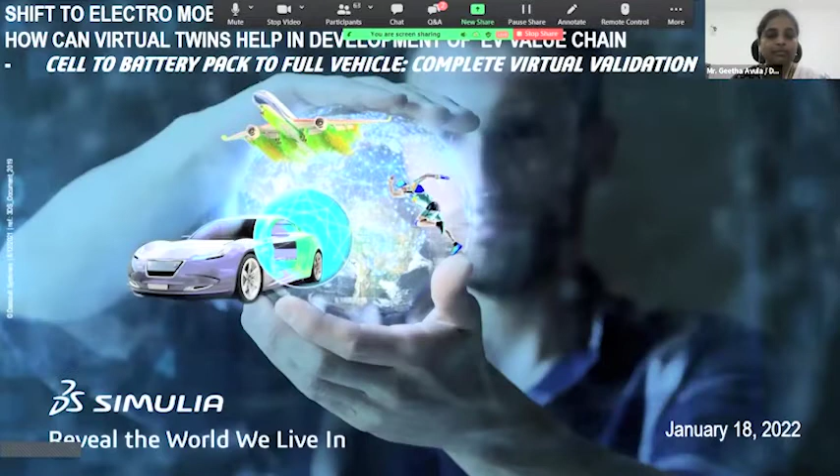We had interesting discussions from other panelists on how we are evolving in the EV space and the trends and challenges we are facing. In the next ten minutes, I'll take you through a short presentation on how virtual twins can help in the development of EVs, right from cell to battery pack to full vehicle.

So what are virtual twins? Virtual twins are essentially used to model complex systems, be it cars, cities, factories, or human hearts, wherein we could simulate the functioning of these systems with a very high level of accuracy. Whether at an assembly, sub-assembly, system, or subsystem level, we could build a virtual twin that is a replica of the actual physical model on the digital platform, and understand the behavior and performance by simulating and doing various testing.

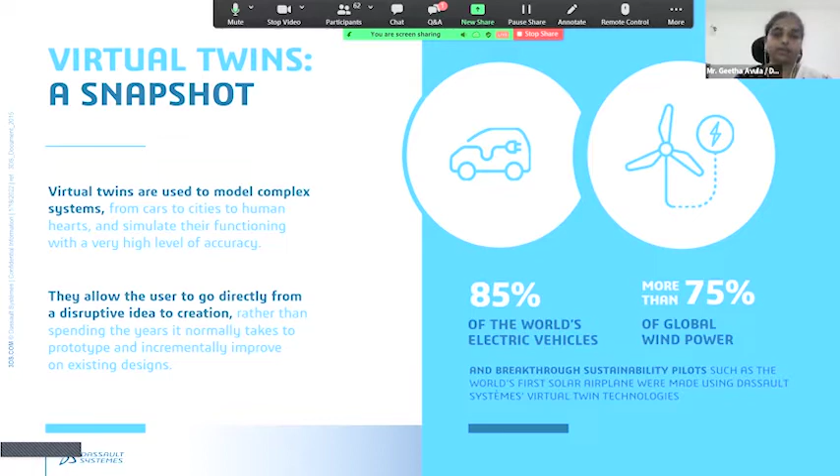Essentially, by avoiding physical, costly prototyping, we can directly go from ideation to creation by using these virtual twin techniques.

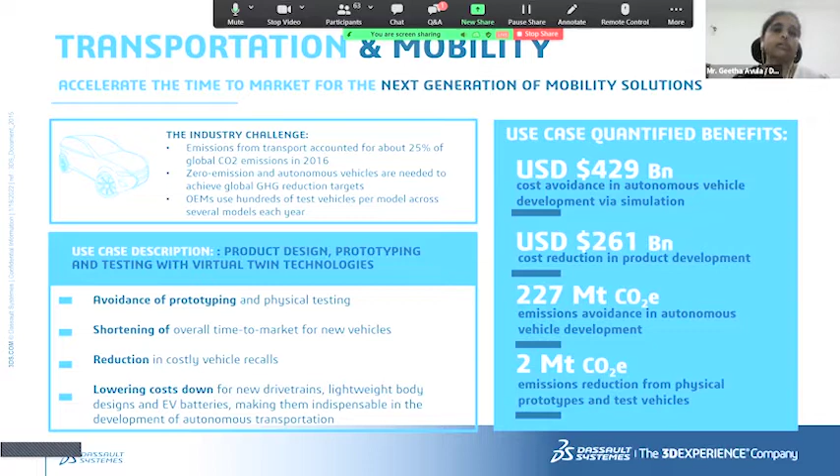If you look at the transportation and mobility industry, the other panelists have certainly spoken about the industry challenges, and emission is a concern. From the automotive industry, emissions account for about 25% of global CO2 emissions. To achieve global greenhouse gas reduction targets, everybody is moving towards zero emission and autonomous vehicles. Typically, OEMs use hundreds of test vehicles per model every year for testing purposes. So clearly the use of virtual twins will help avoid prototyping and physical testing, shorten the overall time to market of new vehicles, and reduce costly vehicle recalls, since warranty costs can be avoided by understanding system performance through virtual simulation, thereby reducing the overall cost of the vehicle and its components.

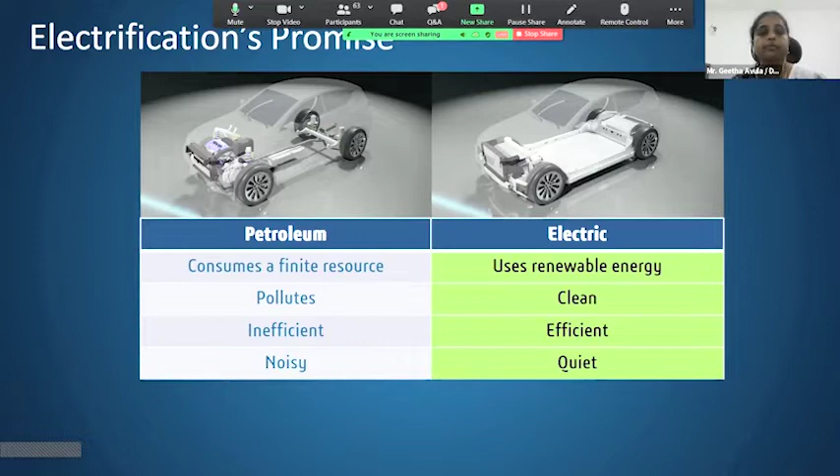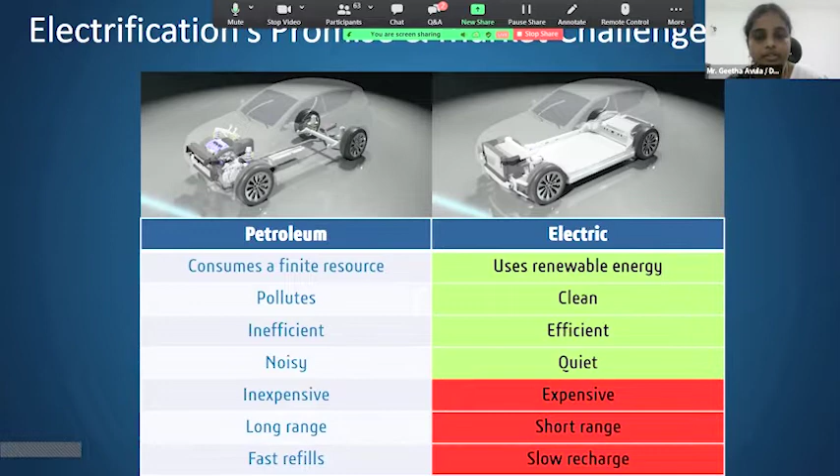If you look at electrification, it uses renewable energy, is clean, efficient, and quiet, but it comes with certain market challenges: vehicles are expensive at this point, range is a concern, and charging time is also a concern, though these are being looked at. Looking at trends in electric vehicles, everybody is striving for better performance than ICE vehicles, trying to provide these vehicles at an attractive cost. Range is a huge factor, and everybody is striving for better battery life and reduced charging times. In EVs we're talking mainly about lithium-ion batteries, so safety and durability aspects are also being looked at.

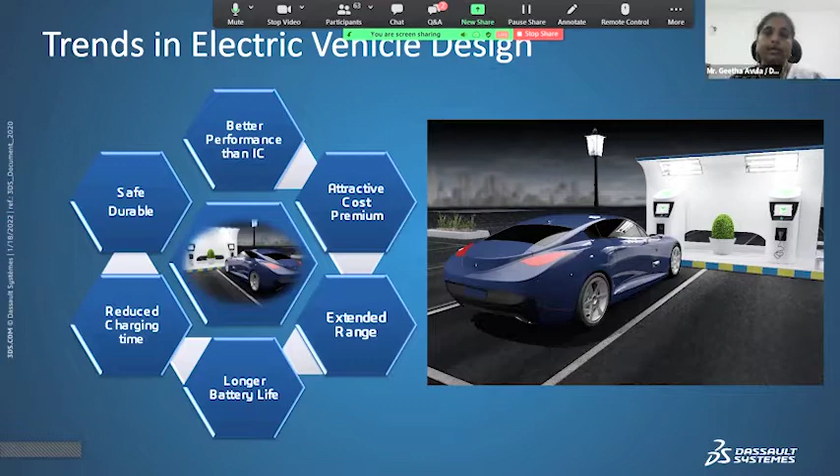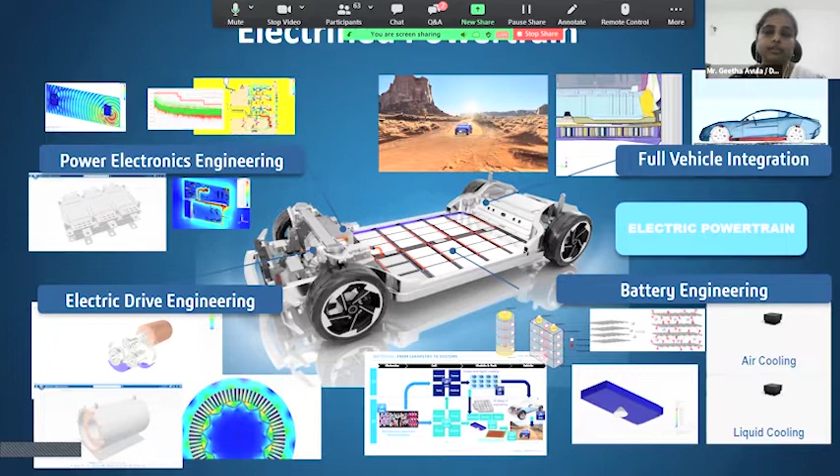If we talk about electrification, we typically have three key domains: battery, e-drive, and power electronics, and then we look at the integration of these three domains at a full vehicle level.

I'll speak a little about each of these three key domains and explain how our solutions can help in understanding these domains better. If you talk about batteries, we have complete digital twin coverage right from chemistry to systems.

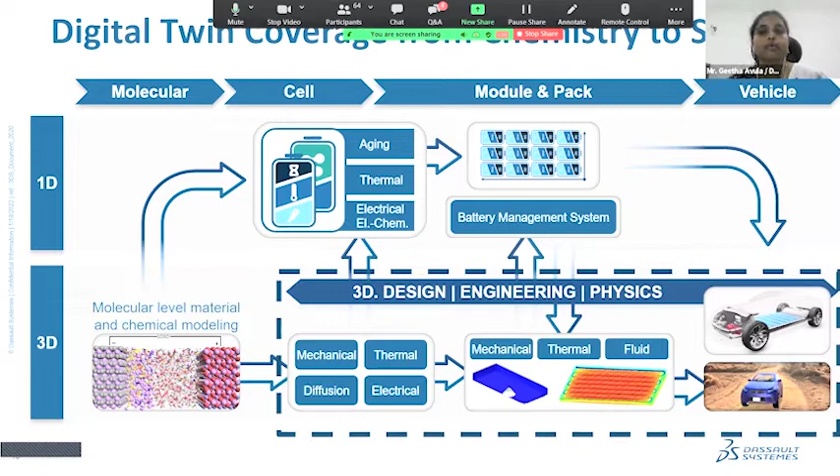Talking about battery cell, there are a bunch of workflows people typically look at. One can start off with a detailed battery cell design and then perform MOR kind of studies. We could look at electrochemical performance, thermal electrical losses to understand where a cell is getting charged and discharged across different cycles. We could look at stiffness, durability aspects, and safety aspects can be simulated, like thermal runaway and abusive conditions like short circuit. We could also look at degradation and aging aspects.

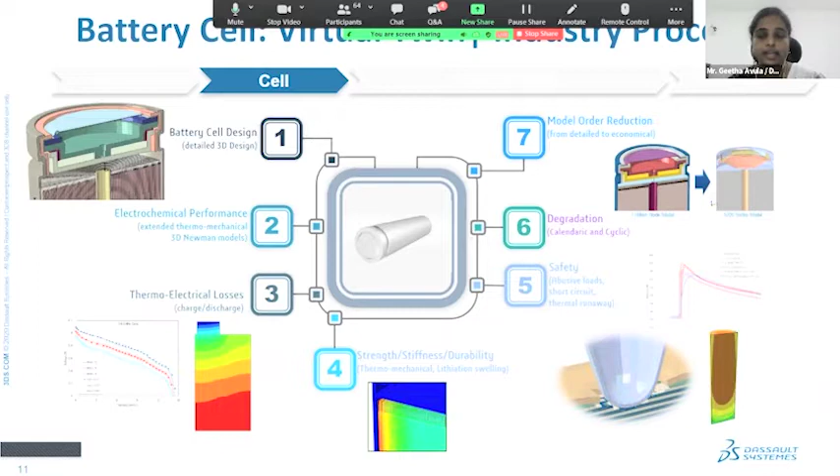Moving to module and pack, the same level of workflows are applicable, except here we're talking of a much larger model. Typically in a module, if you're considering cylindrical cells, you would have somewhere between 300 to 400 cells, and in a pack you would have somewhere between 13 to 14 such modules if you're talking about a four-wheeler.

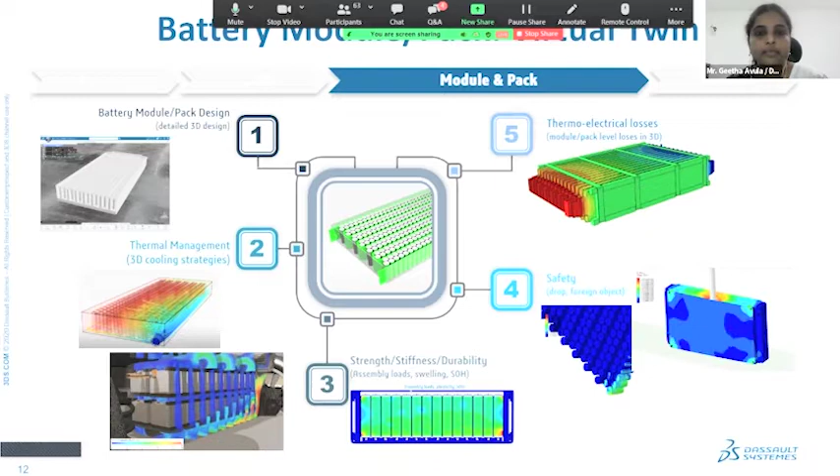Thermal management studies become quite critical when we are talking about module and pack level simulations. Here again, we could look at strength, stiffness, and durability aspects, the safety aspects - that is, what happens when the battery pack is dropped, or there is something like nail penetration which occurs. We could also look at cooling aspects, that is, which type of cooling is going to be efficient for your battery pack system.

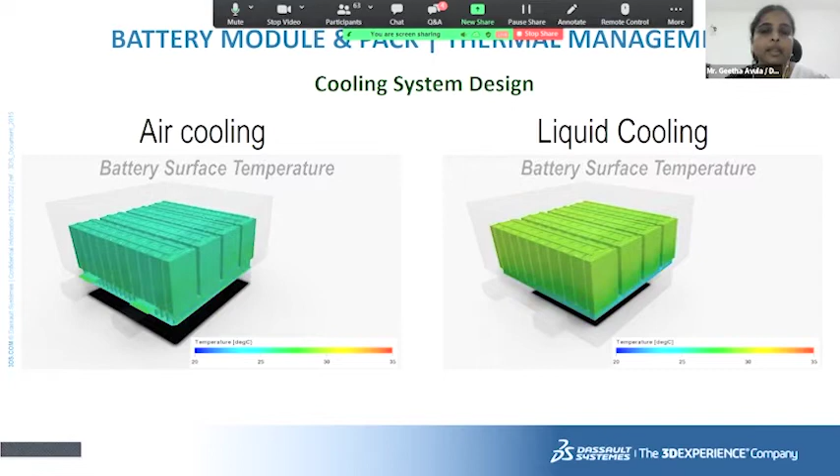Moving on to the next domain, which is electric drive. It's almost like an ideal unit which has mainly three components - the electric machine and gearbox, both of which are encapsulated in a structural housing. It's typically a high energy density machine which is rotating at a very high RPM.

When you have something rotating at such a high speed, there are frictional issues which have to be mitigated, which means there needs to be proper lubrication in place. Also, the electric machine and gearbox are encapsulated in the housing, which would act as the speaker itself, so you have to work on mitigating the noise aspects as well, and look at light weighting and things like that.

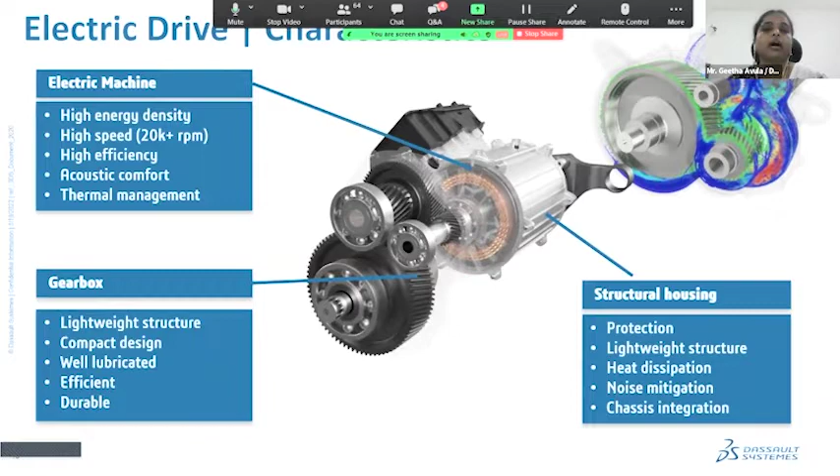So in order to help users understand the behavior of the system better, we've come up with something called the electric drive industry process, where once the system design is in place and verification and validation is done, a concept design is built, and from there a detailed design takes place.

To understand the performance and behavior of this detailed design system, we have some standardized workflows. We could look at the noise and vibration aspects, the electromagnetic performance, thermal management, lubrication studies, strength, stiffness, and so on. We have guided workflows for each of these aspects which would help users understand what steps need to be followed to carry out these analyses. Of course, these are clubbed with other domains like battery engineering and power electronics.

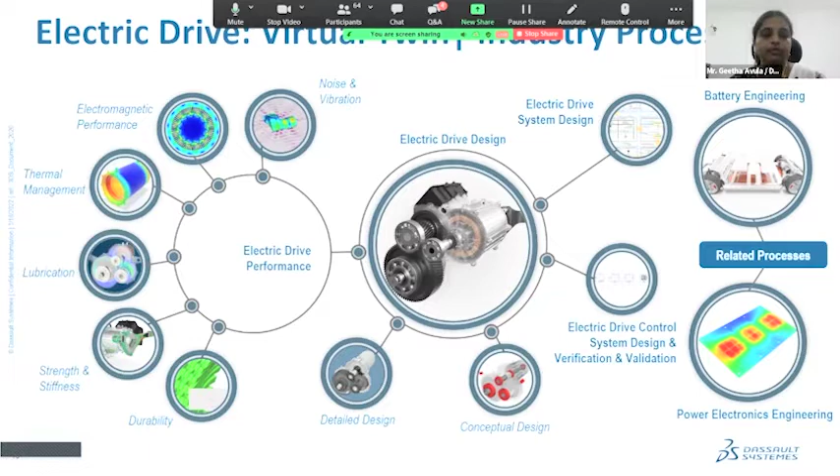I would like to play a very quick video showcasing some of these solutions. I'll allow you to watch it for a minute.

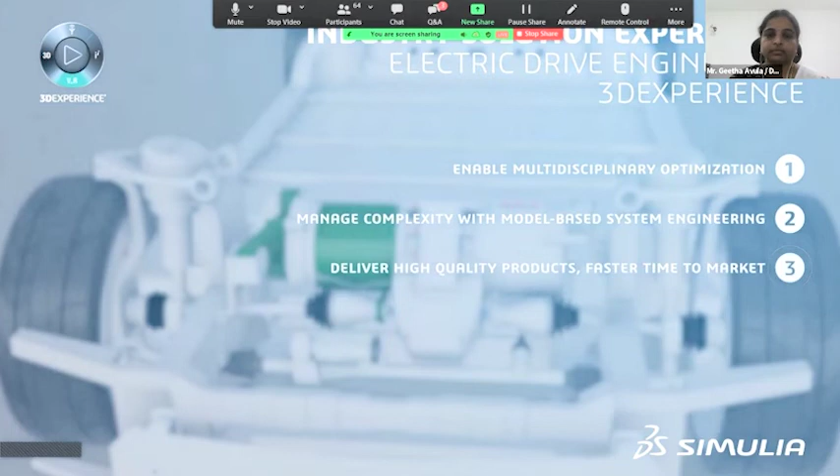With that, let me move to the last domain, which is power electronics. When we say a battery is the heart of an EV, power electronics is like the brain of an EV, controlling different units. If you look at the functional components of power electronics, we have DC-AC inverter, DC-DC converter, the plug-in charging systems, and the wireless charging system.

Typically, the challenges we see with this unit are mainly again on the thermal management. EMC compliance is again one key thing when we talk about power electronics, and of course space and weight reduction aspects are there with any domain we talk about.

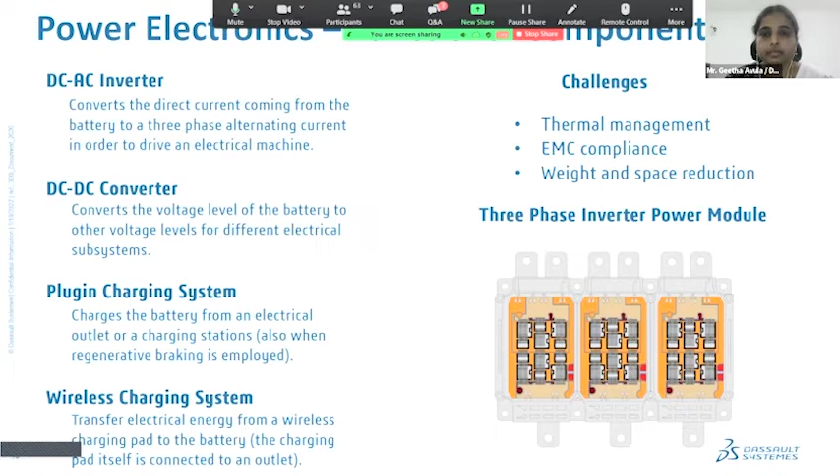If you take a look at this three-phase inverter power module, we have different components like IGBTs, diodes, and wire bonds connecting them. When the DC to AC conversion happens, there is a lot of switching that occurs, which generates a lot of heat, and this has to be mitigated with a proper cooling system in place.

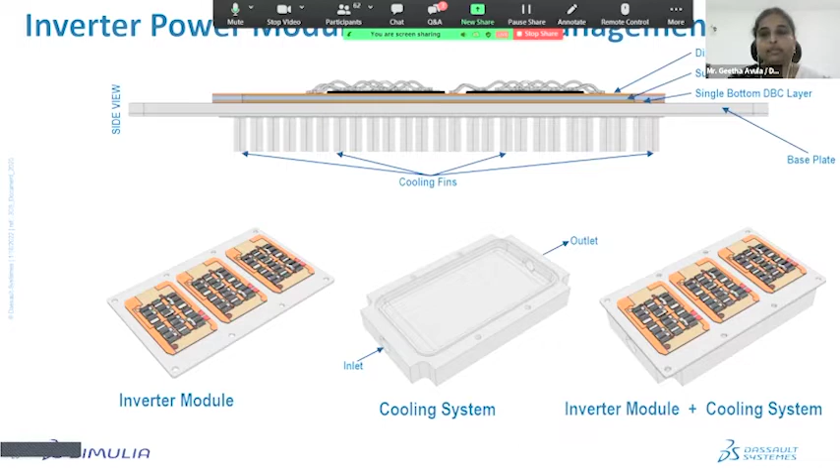Using the solutions, we can understand how the heat is getting conducted through the base plate and through the cooling fins, and come up with a good cooling system in place which would address these thermal management issues. We could perform what-if kind of design scenarios and understand what would be the best cooling system in place to help mitigate these issues.

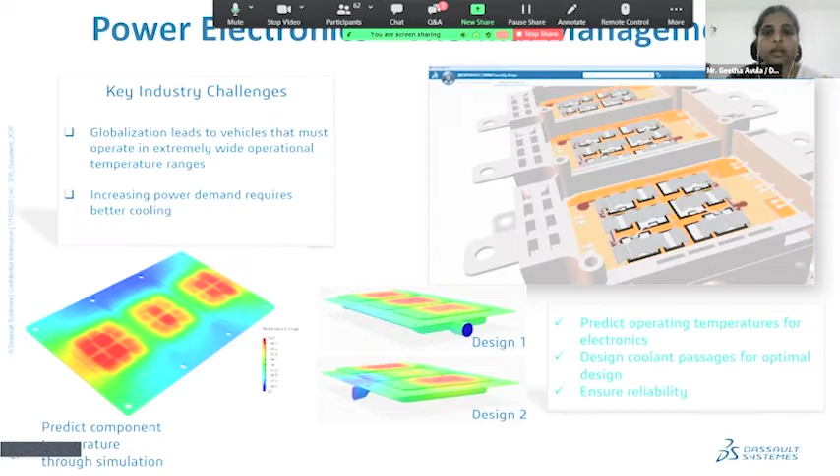We have seen the solutions for different domains. If you look at full vehicle integration, we could look at the vehicle dynamic aspects to characterize ride and handling, and we could look at studies like crashworthiness to understand impact studies.

We could look at full vehicle thermal management, what we call sun soak simulations. Let's say typically you have the vehicle under the sun for about 7 to 8 hours, and you want to understand the impact of how the temperature is being absorbed in the cabin, and how to have a better understanding of the battery positioning for better thermal management. All of these studies can be done at a full vehicle level as well.